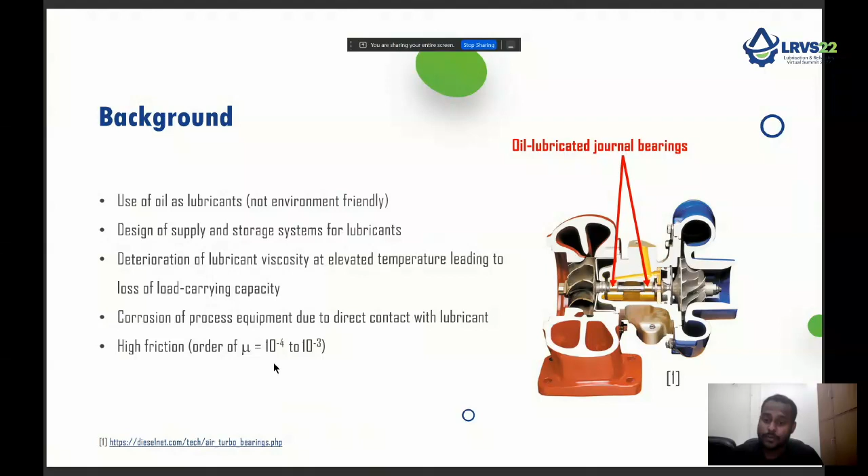Coming to the background, in the area of turbo machinery, oil lubricated journal bearings and rolling element bearings have been primarily used. However, these oil lubricated journal bearing supported rotors have various disadvantages, such as use of oil as lubricant, which is not environmentally friendly, design of supply and storage systems for lubricants, deterioration of lubricant viscosity at elevated temperature leading to loss of load carrying capacity, corrosion of process equipment due to direct contact with the lubricant, and very high friction in the order of 10 to the power minus 4 to 10 to the power minus 3.

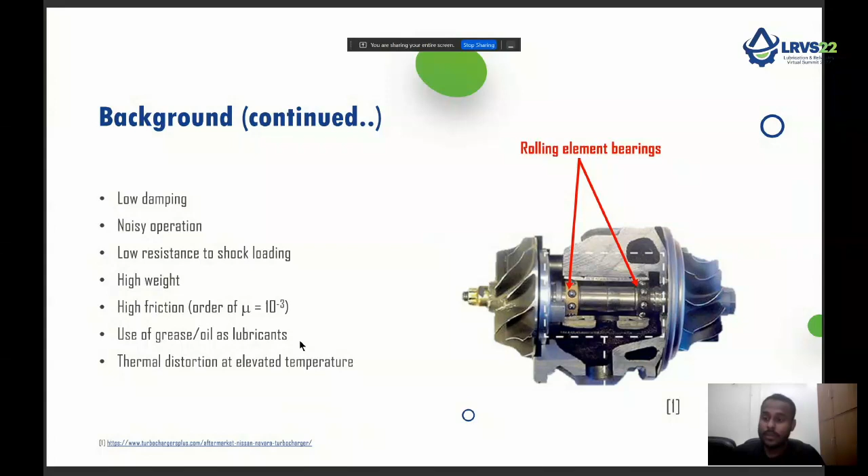Similarly, for turbo machinery with rotors supported on rolling element bearings, there are multiple disadvantages such as low damping, noisy operation, low resistance to shock loading, high weight, high friction in the order of 10 to the power minus 3, again use of grease or oil as lubricants, and thermal distortion at elevated temperatures.

So turbo machinery supported on conventional oil lubricated and rolling element bearings have limited speed applications due to these disadvantages. However, modern turbo machinery demands ultra high rotational speed operating from cryogenic to severe operating temperature environments in order to enhance operational efficiency. So this gives the motivation to work on and develop a green technology.

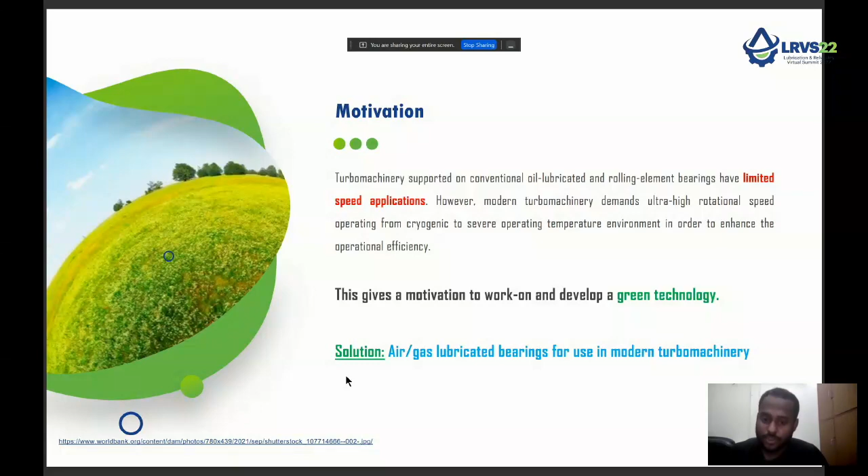So what is the proposed solution? Air or gas lubricated bearings for use in modern turbo machinery. Coming to the advantages of air and gas bearings: these bearings do not use any oil or grease, hence the environment is oil or grease free, hence it is a green technology. Very low coefficient of friction in the order of 10 to the power minus 4, sometimes it can go to 10 to the power minus 6 as well. Operation from cryogenic temperature to extremely hot temperature, reduced weight, and maintenance due to elimination of all supply and storage systems.

So here I have shown two different kinds of air bearings. First is the aerodynamic bearings, which do not use any external supply - the design is very simple, it is just a hole under which the rotor will be supported. The second type of air bearings are the aerostatic bearings, where we will be supplying externally pressurized air to lift the rotor.

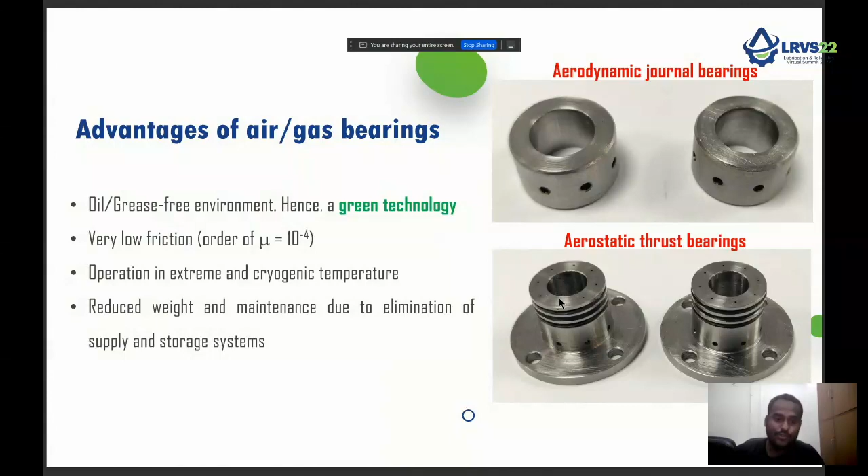So the few applications of these air or gas bearings are like air cycle machines to maintain the atmosphere and temperature inside commercial and fighter aircrafts, turbo-pumps used during the launching of space launch vehicles, cryogenic turbo expanders to liquefy nitrogen or other gases, high-speed automobile turbochargers, medical centrifuges, dental handpieces, miniature gas turbine engines and fuel cells, spindles of textile and food processing industries, and coordinate measuring machines.

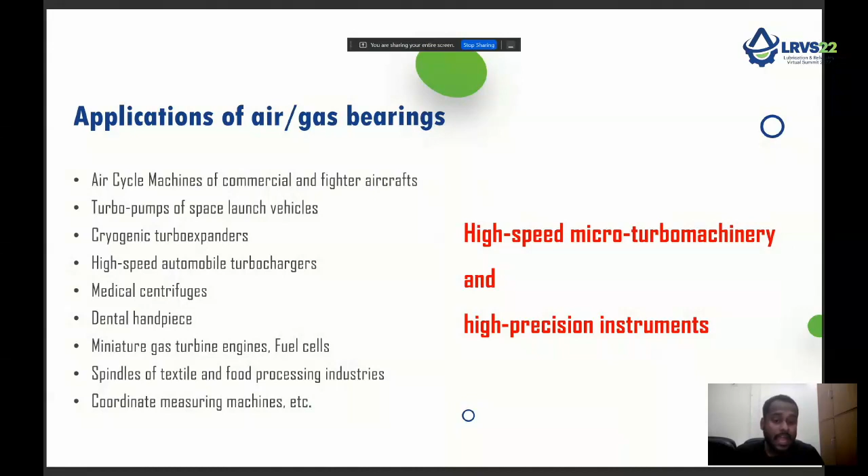So all these applications can be classified into two types: first, high-speed micro-turbo machinery, where aerodynamic bearings are primarily used; second, high-precision instruments, where aerostatic bearings are primarily used.

Coming to the introduction, how the air bearing looks like. Here it can be seen that there is a bearing sleeve and there is a rotor, and inside which the air or gas is there. So the rotor is floating over a thin film of air or gas, as with oil lubricated bearings where a thin film of oil is there. Here, in place of oil, air film is there.

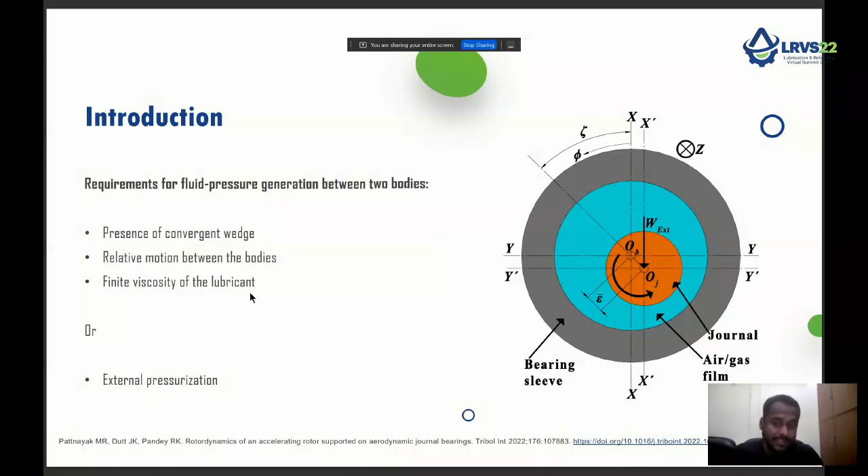So the requirement of fluid pressure generation between two bodies: there has to be a convergent wedge to generate the pressure, and there should be relative motion between the two bodies - so when the rotor rotates, then only the pressure will develop. The third point is the finite viscosity of the lubricant, which air has. However, the other type of bearings, the aerostatic bearings, use external pressurization.

The working mechanism: when the rotor rotates in the converging zone, there is development of aerodynamic pressure. However, in the divergent zone, where the film thickness gradually increases, there is creation of suction. The atmospheric air sucks inside the bearing in this region, and the same air gets circulated in the converging region to develop the aerodynamic pressure.

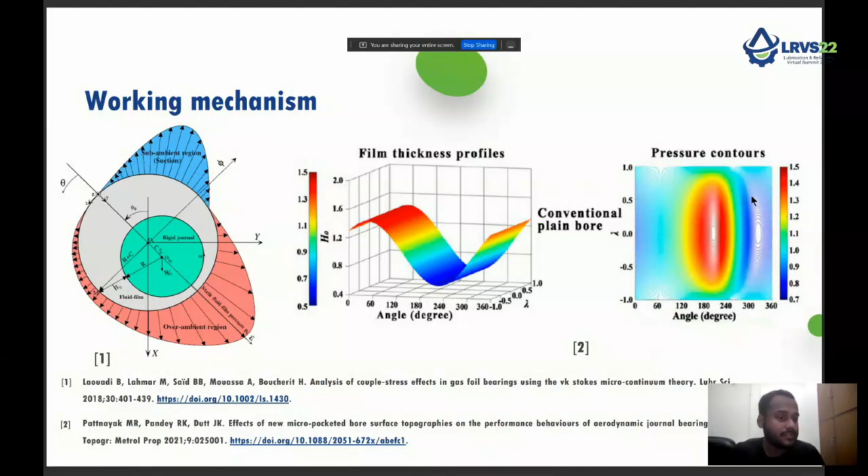Here is a representation of the variation of film thickness and pressure. Clearly, there are two distinct regions in the air bearings: the first is the positive pressure zone, and the second is the negative pressure zone. This has also been verified by experiments.

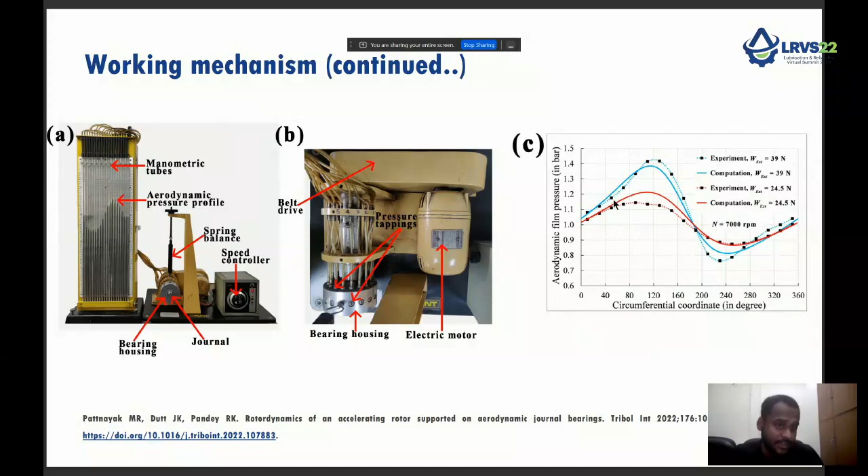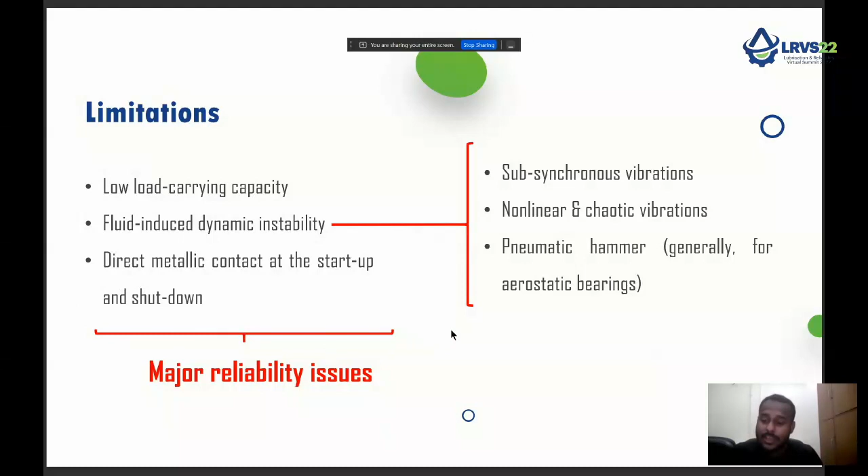However, these air bearings have a couple of limitations. First, low load carrying capacity due to extremely low viscosity of air compared to oil. Second, fluid induced dynamic instability, such as subsynchronous vibrations, nonlinear and chaotic vibrations, pneumatic hammer, which is generally seen for aerostatic bearings. The third limitation is direct metallic contact during startup and shutdown when there is not enough gas film. These limitations have major reliability issues for gas air bearings.

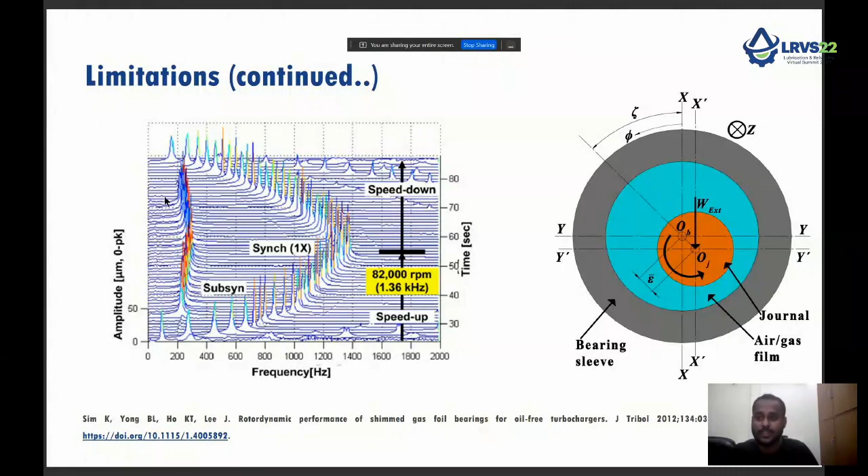Therefore, what are the ongoing research efforts to eliminate these disadvantages? The primary research is based on geometry modification techniques incorporating pockets, textures, grooves, or lobes. Here it can be seen that there are varieties of bearings where on the rotor there are varieties of textures like grooves. Here you can see a helical groove, this is a herringbone groove. Here the bore is an elliptic bore, this is a conical bore.

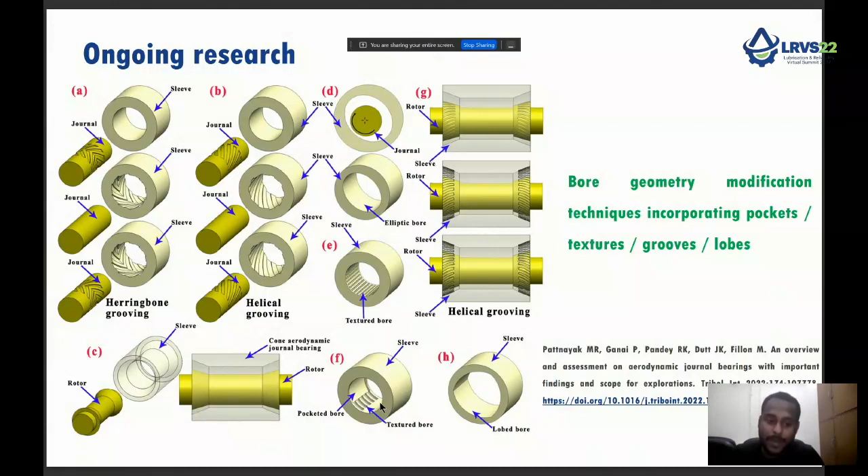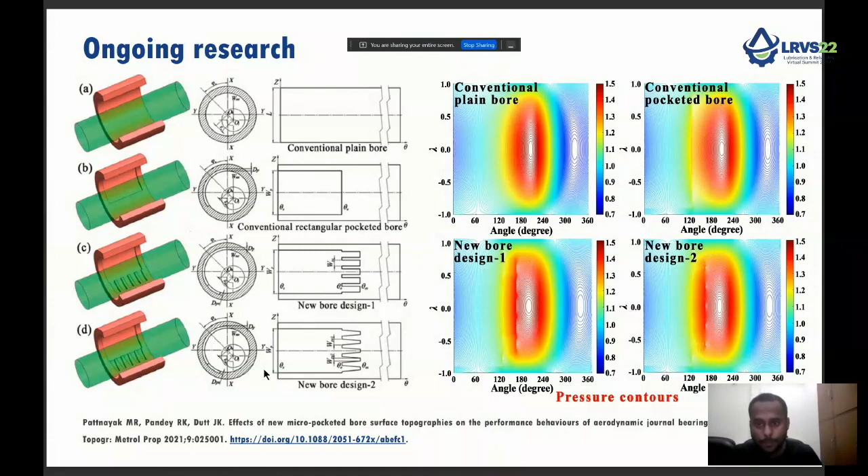There are different textures present on the bore. Similarly, there are pockets or textures. All these yield performance improvement in air bearings. The same thing has been shown here: on the bore we have introduced pockets, and after the pocket there are textures. These new bearing bores improve the performance of air bearings.

So why do these textures or pockets improve the performance in air bearings? What we observed in our research is that these tiny dimples act as micro reservoirs which store gas or air film and provide lubricity to the interface. Second, these small dimples act as micro small bearings.

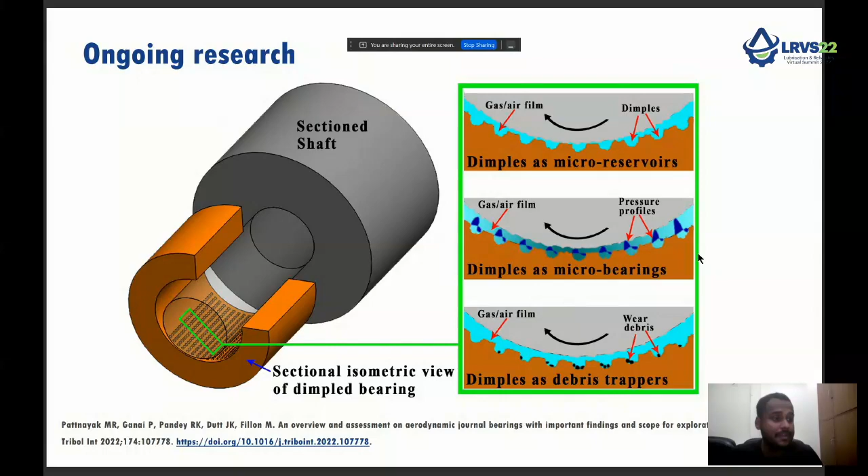So there is a larger bearing as well as small micro bearings, which induce pressure spikes to improve the load carrying capacity. The third mechanism is that even if certain debris gets generated, these dimples can trap the debris and restrict damage to the rotor and bearings.

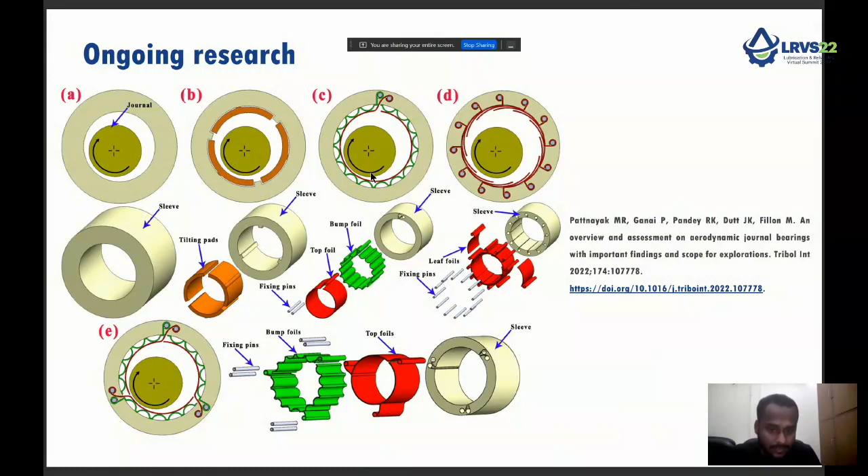The second ongoing research is the use of compliant bore. Here it can be seen that figure A is a rigid bore, figure B is a tilting pad air bearing, and figures C, D, and E are compliant bores where the bore itself deforms as a result of aerodynamic pressure, which enhances the dynamic performance of rotors supported on air bearings.

A lot of bearings have been developed by varieties of researchers. A summary of all the bearings can be found in a review paper recently published: an overview and assessment on aerodynamic journal bearings with important findings and scope for exploration.

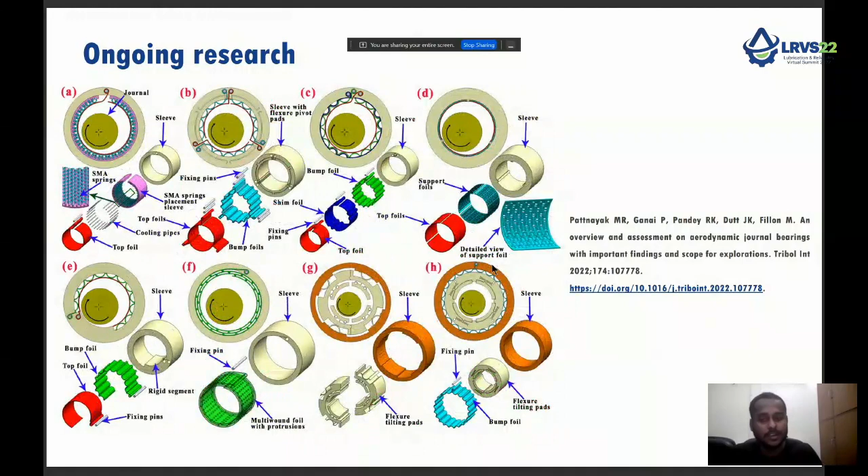However, the design principle of such air bearings is still not standardized or unique. Based on the customer's requirement, there is a customized design of various air bearings. So what are the overall design principles of an air bearing? Design should be for maximum load carrying capacity, minimum power loss, and minimum rotor runout.

What are the design parameters? Bearing clearance, bearing diameter, bearing aspect ratio. What are the operating parameters? Applied load, rotational speed, temperature, humidity, etc. And the constraints are manufacturing precision, cost of air bearing parts, manpower. There are varieties of passive methods and active methods to improve the tribological and dynamic performance as well as thermal performance.

Some examples are using textures, pockets, or grooves by tailoring compliant bore geometry to vary stiffness of the compliant bore, use of extra structures such as viscoelastic foils, external dampers, shape memory alloy springs under the top foil to control bore stiffness, active electronic sensors, magnetorheological fluid, and solid lubricants to minimize heating during rotor start and stop.

Again, using surface textures to efficiently dissipate heat, and modification of housing and bore geometry to aid in effective removal of heat from the system.

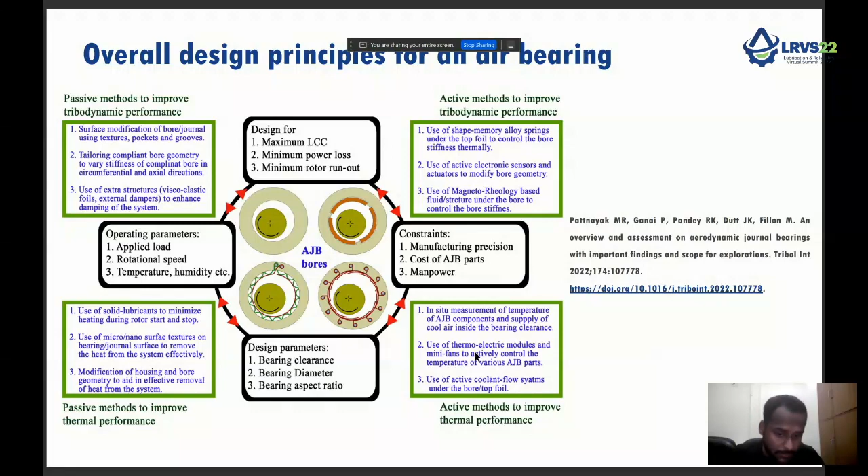Similarly, some active methods to improve thermal performance include in-situ measurement of temperature of air journal bearing components and supply of cooling air, use of thermoelectric modules, mini fans to actively control temperature, and use of active coolant flow systems under the bore top foil.

A new direction of research has recently been published in Tribology International, where our proposal was based on the observation that rotors supported on air bearings accelerate to or decelerate from their operating speed during operation. So what if the rotor fails during acceleration or retardation?

So we proposed a new research where we established the rotordynamic behavior of accelerating rotors supported on aerodynamic journal bearings. In this article, we have also proposed a control algorithm to control the rotordynamic response during acceleration and retardation, to minimize vibrations and frequency of oscillations.

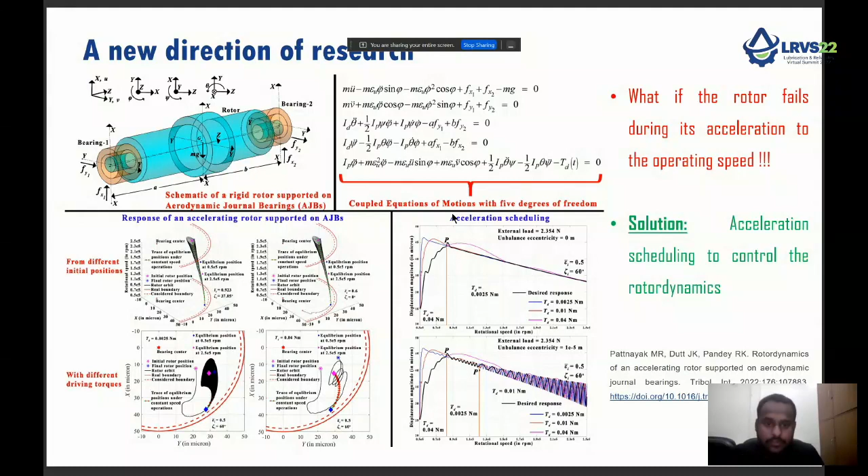What are the scope of research for the future? The first point is exploration of operation of the rotor air bearing system in the mixed lubrication regime, where the surface asperities interact with each other in addition to the air lubrication.

So it can be seen that for journal bearings or slider bearings, when these bearings operate in the mixed lubrication regime, in addition to air lubricity there is also friction due to the asperities. The second vital research area is the fracture and fatigue behavior of rotors supported on air bearings.

Through this research we will certainly improve the reliability of air bearings, conducting rigorous long duration rotordynamic tests to explore the life and reliability of air bearings.

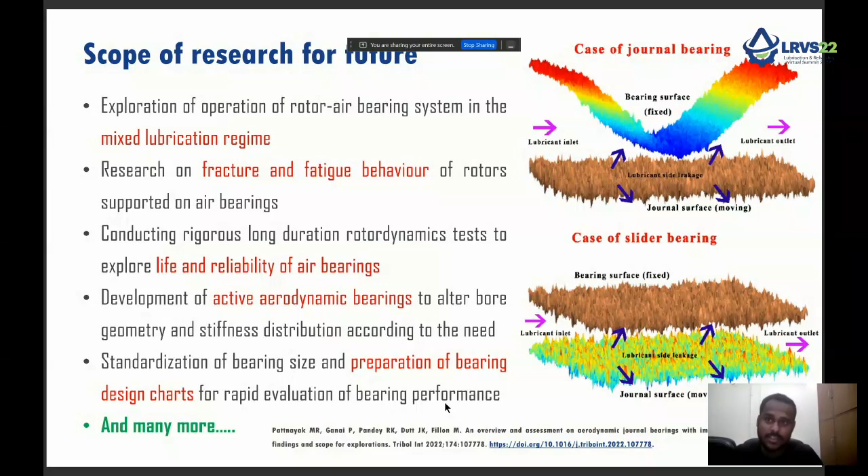Development of active aerodynamic bearings to alter bore geometry and stiffness distribution according to need, and standardization of bearing size with preparation of bearing design charts, like oil journal bearings, for rapid evaluation of bearing performance. There are many more research areas which should be pursued.

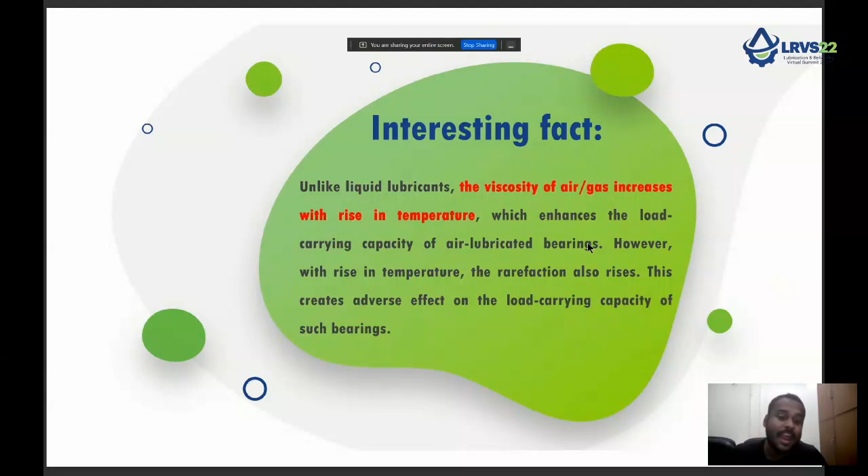One interesting fact: unlike liquid lubricants, the viscosity of air or gas increases with rise in temperature, which enhances the load carrying capacity of air bearings. However, with rise in temperature the rarefaction also rises, which creates an adverse effect on the load carrying capacity of such bearings.

Thank you. I welcome now the questions.

Wow, that was interesting. That was really interesting. And I have a question personally. I think you explained it, but I didn't really get it very well.

So, when air is lubricating, why is the pressure of the air not equal from all sides? First, the film thickness between the rotor and the stator is not uniform, so it provides a variety of differences in pressures.

Sorry, can you repeat that? The film thickness between the rotor and the stator is not uniform, not constant, and that provides a converging wedge or a diverging wedge. Due to that effect, the pressure is not constant inside the air bearings.

Okay, so does your research work on solving this issue of the pressure of the air not being constant? Yes, the major disadvantages of these air bearings are low load carrying capacity and the rotors supported on them being highly unstable.